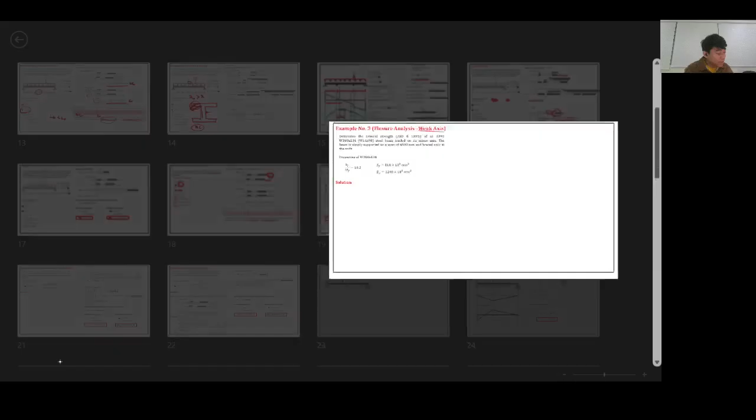So problem number 3, flexure analysis. Pero we're talking about here the weak axis. If not mentioned on the problem, always assume na sa strong axis siya mag-bend. Sa code natin guys, we're going to look at the code. Okay, so ang bending lang dyan sa weak axis ay yung 506.6.

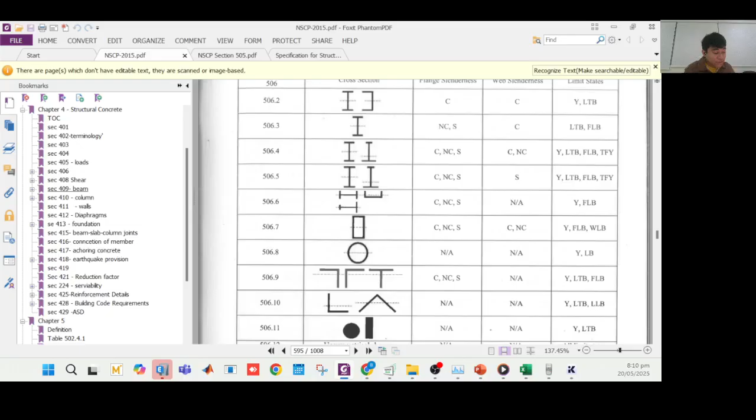Okay, so may mga line dyan, bending about certain axis. Strong axis yan. Strong dito. Pero pag nakaganyan class, madali siyang i-bend, kasi maliit ang moment of inertia sa axis na yan. Yung radius of gyration, maliit din. So these are bending about the y-axis. So technically, for W section, we'll be using 506.6.

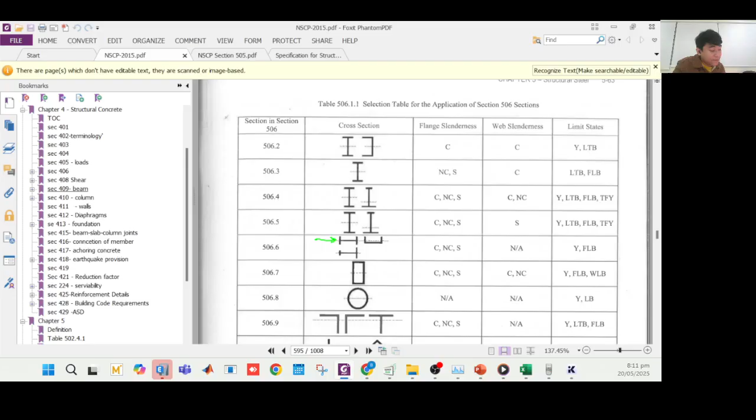Ano daw yung code, ano yung limit state natin? Yielding and flange local buckling. Walang lateral torsional. Bakit? Kasi class, matigas na yan dito sa side na to. So, mahirap na siyang sirain. Hindi na magkakaroon ng bending yan sa axis na to, kasi yung load mo downward lang.

Unlike na ganito class, pag nag-bend yan dito, dahil weak yung y-axis, possible siya mag-bend din laterally. Pero pagka ganito yung orientation mo, walang lateral torsional buckling. Yielding lang, tsaka flange local buckling. You don't have also to check the web slenderness. Ito na lang check natin, the flange slenderness. Kasi hindi naman applicable ang flange local buckling kung compact yung ating flange. So, gagamitin mo lang yung flange local buckling kung non-compact tsaka slender siya.

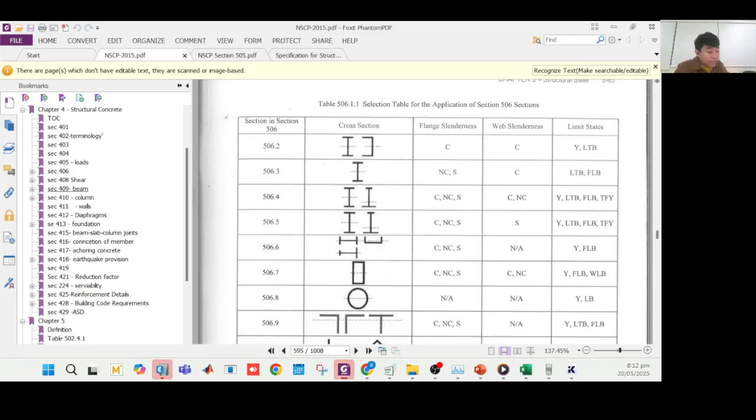Okay? So, tingnan natin yung 506.6. Basahin natin yung 506.6. Tingnan nyo class yung formula ng yielding natin. FyZy. Kasi nga, yung bending natin sa y-axis. Ano nga yung definition ng Z? The plastic section modulus, di ba? We solved this from the previous discussion. The nominal moment due to yielding, the plastic moment, is FyZy. But that plastic moment should not exceed 1.6 FySy.

Then, for flange local buckling, for sections with compact flanges, the limit state of yielding shall apply. Yielding na lang daw ang gagamitin pagka compact flange. Hindi mo na solve yung flange. Kasi ito class, non-compact yan. ASTM shapes most have compact flanges. Sobrang konti lang class ng non-compact flanges sa ating database. But anyway, you can solve naman kung compact or non-compact siya.

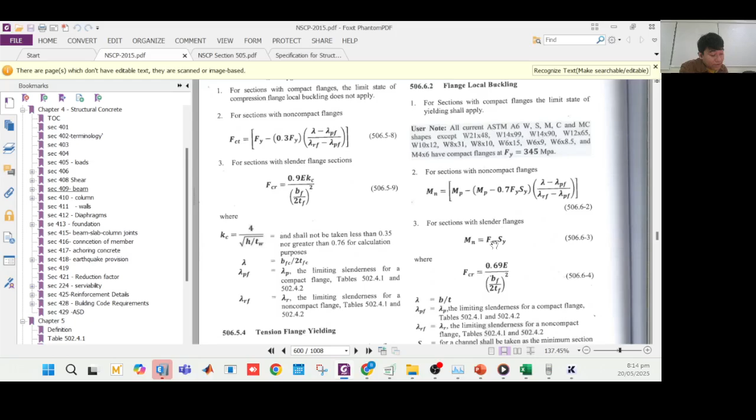Just solve the lambda. So, if non-compact yung flange, ito yung formula, parehas lang kanina sa previous problem. Pero FySx yun. Kung check yung 506.3, may non-compact flange yun. Dito puro Sy, FySy. Tapos, for slender flange, FcrSy. So, medyo iba lang yung konting formula, ginamit lang dito yung Sy, then Zy.

So, let's now try to solve this problem. Since this is bending about the minor axis or the weak axis. If not mentioned, always assume the bending on the major axis or stronger axis. The first thing to do is to check the flange slenderness or the width to thickness ratio. No need for solving the width to thickness ratio of the web. Lambda P is 0.38 square root of E over Fy, and then lambda R is this one. Answer: the flange is non-compact. So, we have to solve the flange local buckling.

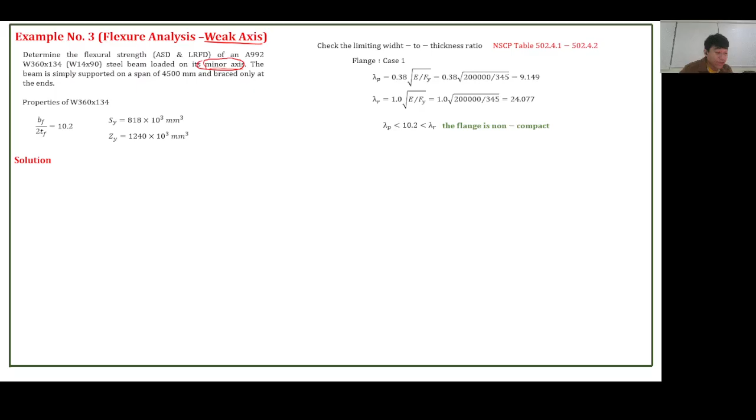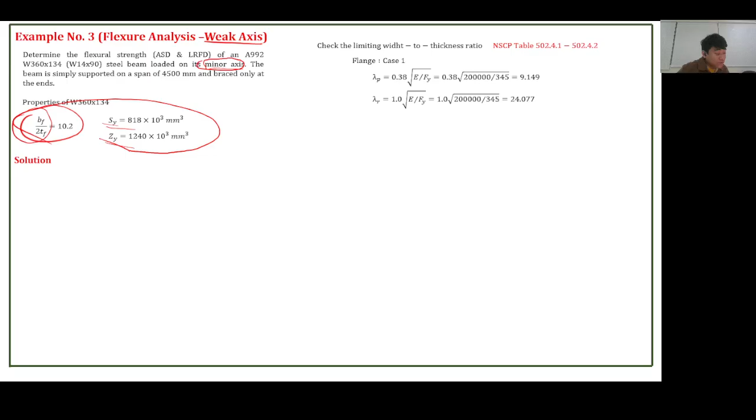Anyway, ito lang pala ang kailangan natin na properties for W section: lambda, Sy tsaka Zy. Konti yung kailangan mo na properties sa W section na bending about the minor axis, tatlo lang. Let's compare, ito yung lambda P. We are going to use A992, and then the unsupported length, braced only at the ends. Simply supported, 4,500. Unless may brace din sa main span, so mahahati ito.

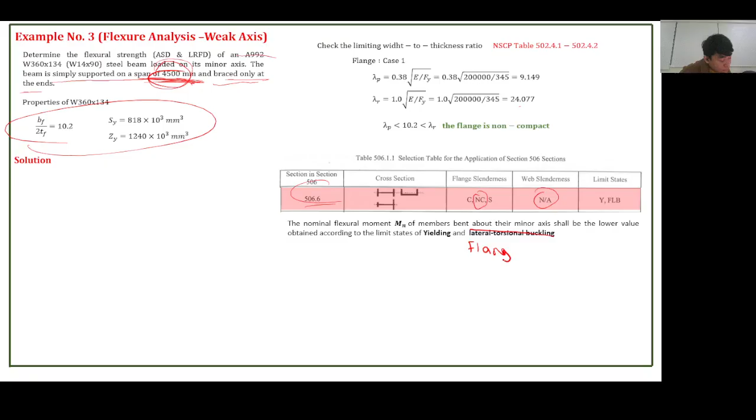So, the flange is non-compact, 506.6. Sorry, this should be flange local buckling. So first is yung yielding, FyZy. That is your plastic moment. But the nominal moment should be less than or equal to this value. So, solve muna natin yung FyZy in kilonewton meter, times 10 raised to negative 6. That is 427.8. Then 1.6 FySy times 10 raised to negative 6, in kilonewton meter.

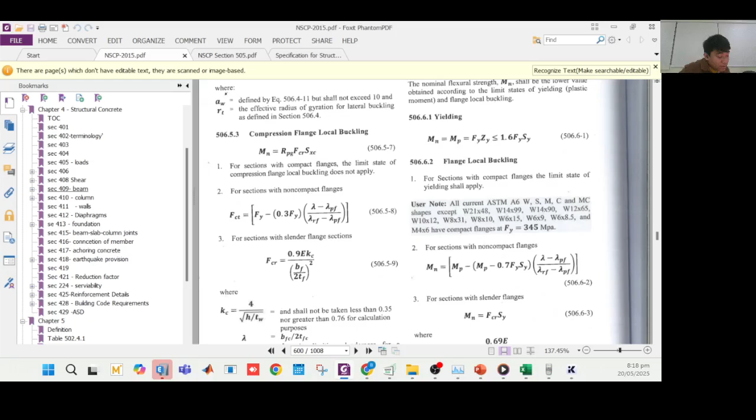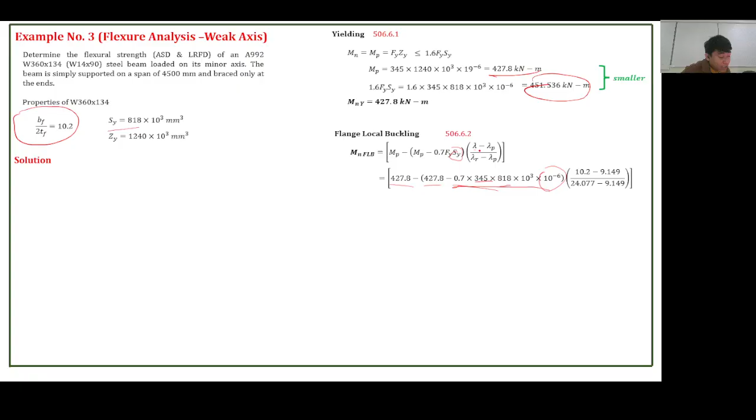So far guys, hindi naman siya nag-exceed dun sa 1.6 FySy. So, we'll still use 427 for the nominal moment in terms of yielding. In terms of flange local buckling, this is the formula. Since non-compact nga siya, itong gagamitin. Kasi pagka compact, wala na tayong isosolve. For slender, ito yung gagamitin, FcrSy. So, 427.8 minus 0.7 FySy times 10 raised to negative 6 para in kilonewton meter, times lambda minus lambda P over lambda R minus lambda P.

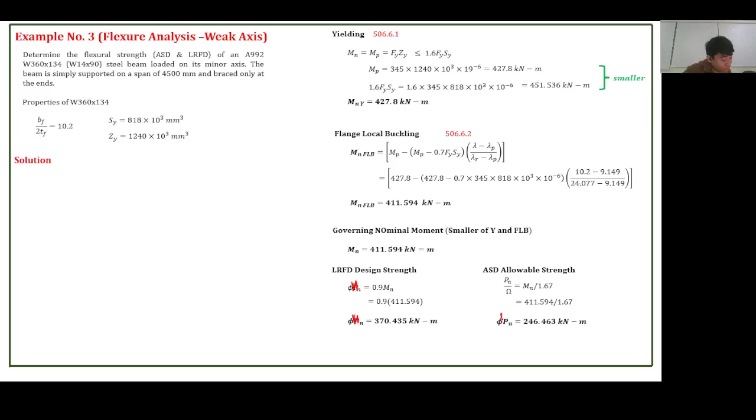Mn is 411.59. Just select the governing nominal moment, smaller of the yielding and flange local buckling. As you can see, flange local buckling governs. So that's it. And then solve the LRFD and ASD. Answers. Okay, so let's have another problem.